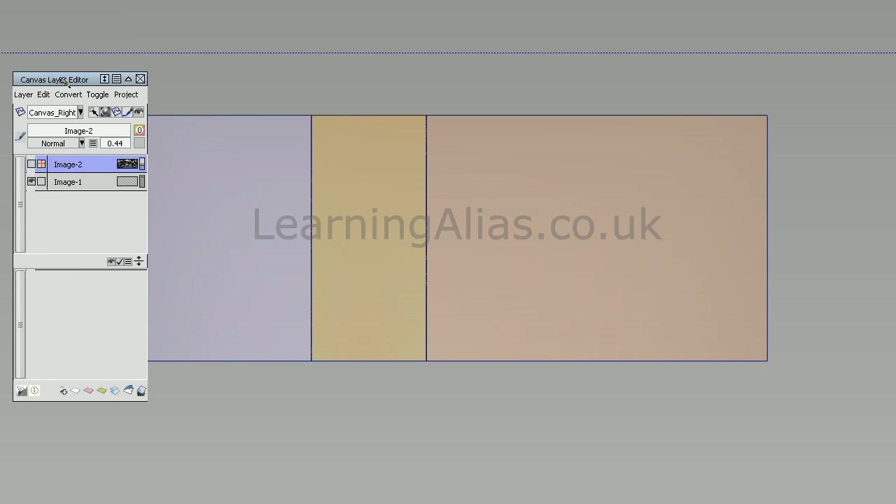Welcome to part 3 of the motorcycle tank tutorials. I'm Alex Popov, and in this video we'll be defining the outer edges of our side surfaces by creating curves, projecting those curves onto the surfaces, and then trimming to our curves on surface. We'll also build the underside surfaces for our tank.

I'm going to use degree 5 edit point curves to define the shoulder line for this tank. Really just trying to work out where the top and side surfaces would intersect, and I'll use this sort of highlight here as reference to where I believe that point will be. So put the first curve down, degree 5 edit point curve, select the CVs and move them into position.

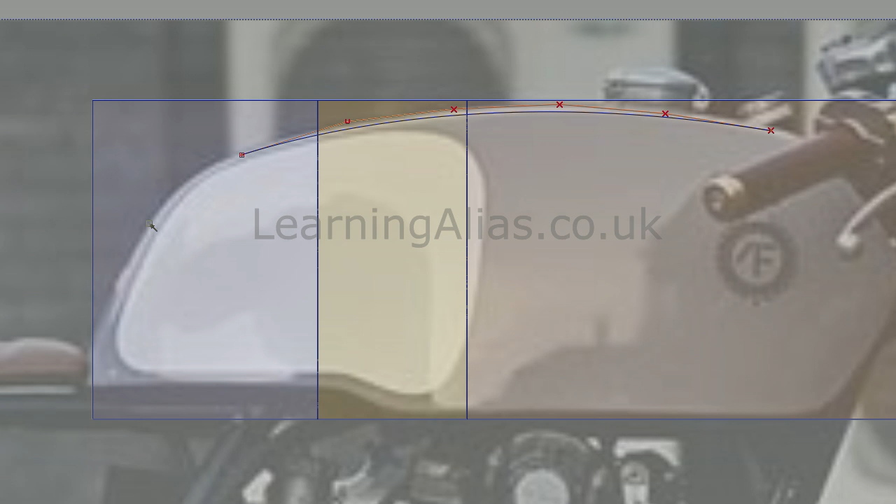When placing the curves, you want to kind of break up your overall shape, so not any one curve is doing too much work. These trimmed edges will build our top surfaces from, and again, you don't want any one surface to be doing too much work. As you can see here, my curve network is broken up into manageable sections. I'll select individual CVs and move them roughly into position so that they reflect the shape of the tank.

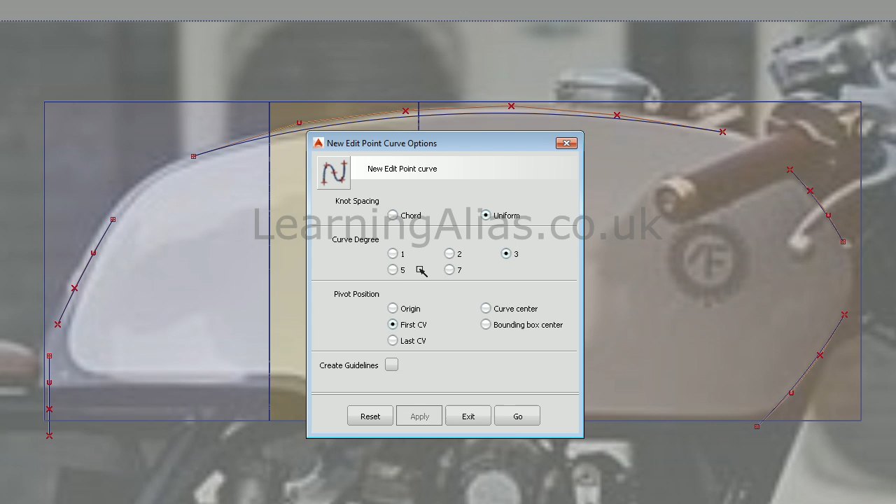For the tighter corners, I'm going to use a degree 3 edit point curve, hold Control and click next to the CV you want to snap to, and they'll snap to position. And to clear the view up a little bit, I'm going to put my surfaces onto an invisible layer. I will now align with G2 continuity these curves here and here, as well as the other side.

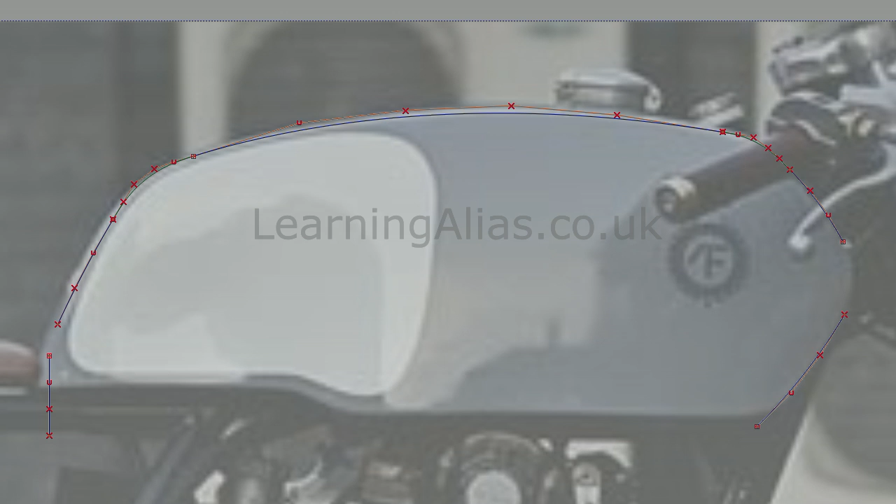For the purposes of this video, with speed and time in mind, I'm just going to show you how to construct these top few curves we've been working on. However, for the remaining curves, the workflow is exactly the same, so just mirror what you've done here. I'll analyze the curves with the curve curvature locator, and then we'll improve the combs using the transform CV tool.

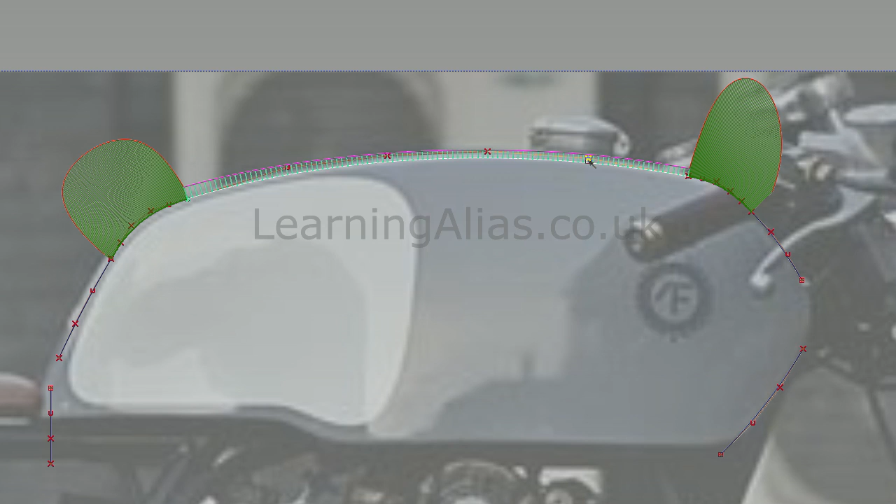The comb is telling us we've got G2 continuity between our curves. However, we can use the transform CV tool to get closer to G3. We can also try and get a more uniform crown on our comb for our aligned curves. Because of the alignment history on our smaller curve, playing with the G1 and G2 CVs on the parent curve will give us a smoother crown to our comb for the aligned curve, as you can see here.

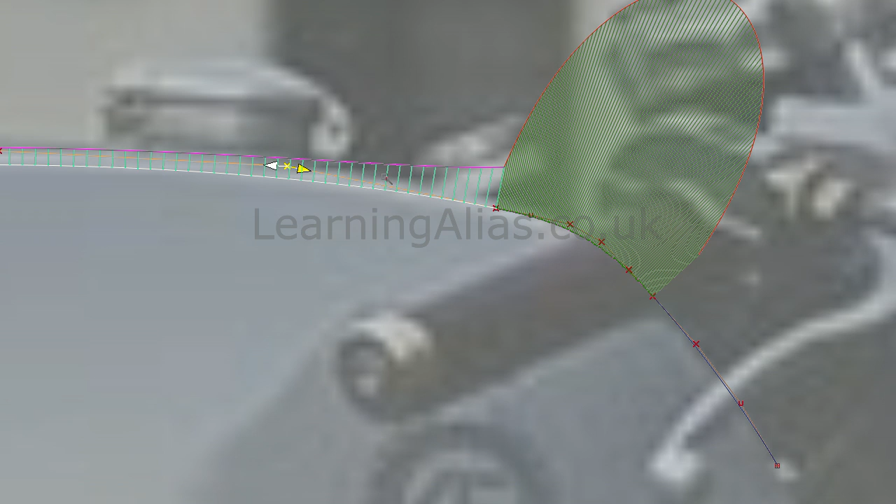I can also play with the G2 CVs on the aligned curve, pulling them close together. We'll get a tighter peak on our comb. Playing with the G1 on the parent curve helps the lead in. So you can see we're getting closer to G3 continuity. Same again on this side.

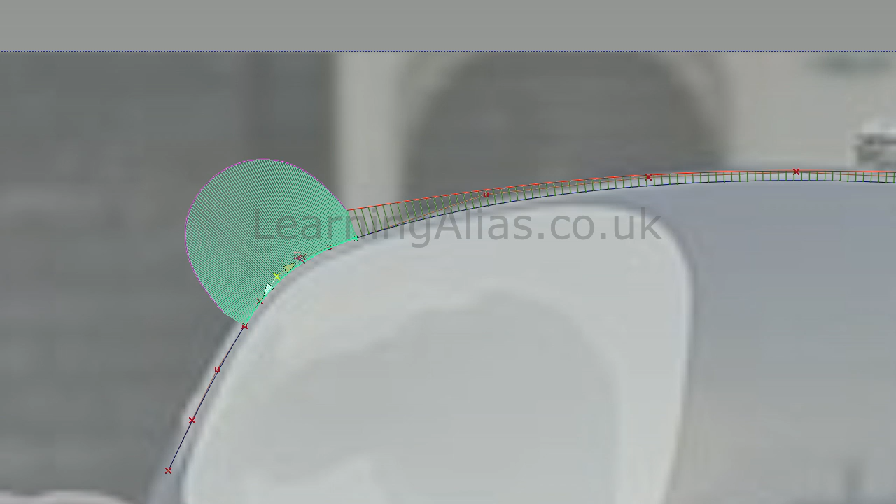Increase the lead in by transforming the CVs on our parent curves and improve the uniformity of our comb. There we go. So you can see we're edging closer and closer to G3 continuity. I can also move the end CVs if I'm struggling to obtain G3.

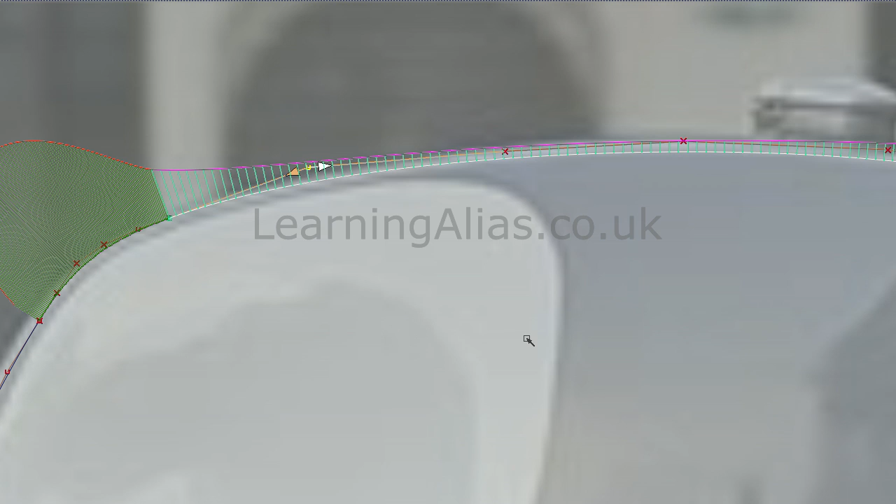The reason for doing all this work is because these curves are going to make our trimmed edges that we're going to build our top surfaces from. It will make obtaining G2 or even G3 continuity along our top surface boundaries far easier. So I'll jump forward and you should end up with a curve set that looks something like this.

And you can apply the curve curvature locators, and when we scale that down to a readable size, you can see that it's all nice and smooth and nice and uniform. Again, this was done using exactly the same workflow as I've just shown you.

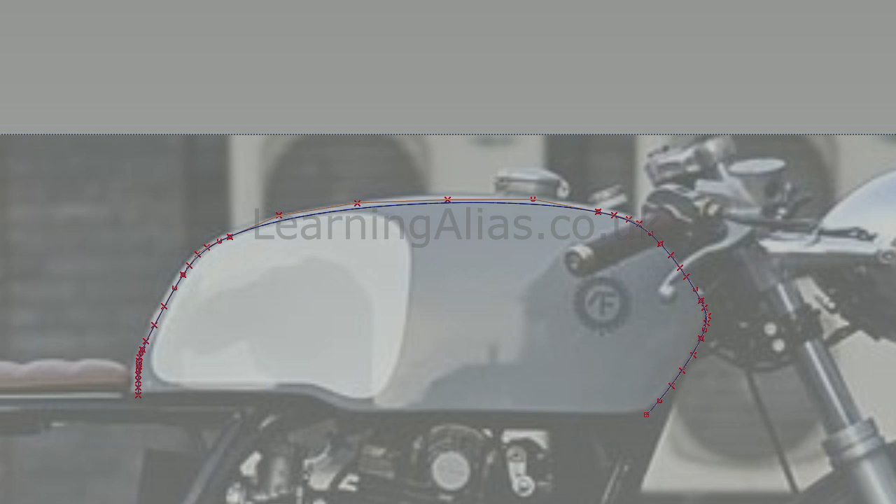So now we're ready to move on to the underside of the tank. Rather than building the underside surfaces from the trimmed edges of our side surfaces, I'll show you a different workflow where we build planes and intersect our planes with our side surfaces.

So planes are considered simple surfaces. You can find them in the surface section of the palette, just here. I'll just quickly toggle my grid back on and snap my plane to the grid by holding Alt. And then I'll set the pivot, Control Alt click, and snap the pivot to here.

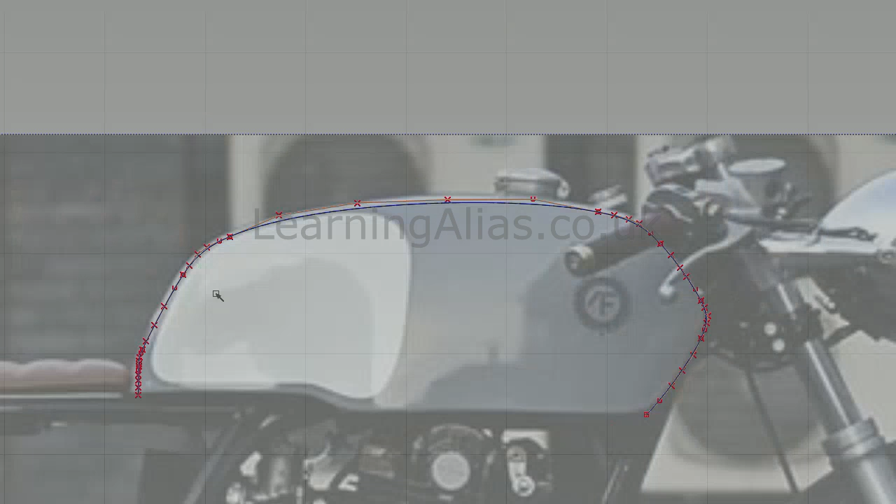Jumping to side view, I can hold Control and move my plane, snapping to that CV there. I'll then scale the plane to where the underside of the tank remains flat, so about there. In top view, you'll see my layer's got symmetry on, which isn't an issue at the moment. What I want to do now is set the pivot, as we did last time, and snap to the grid, constraining to the Y direction. I'll then non-proportional scale my plane outboard so that it's intersecting with the side surfaces.

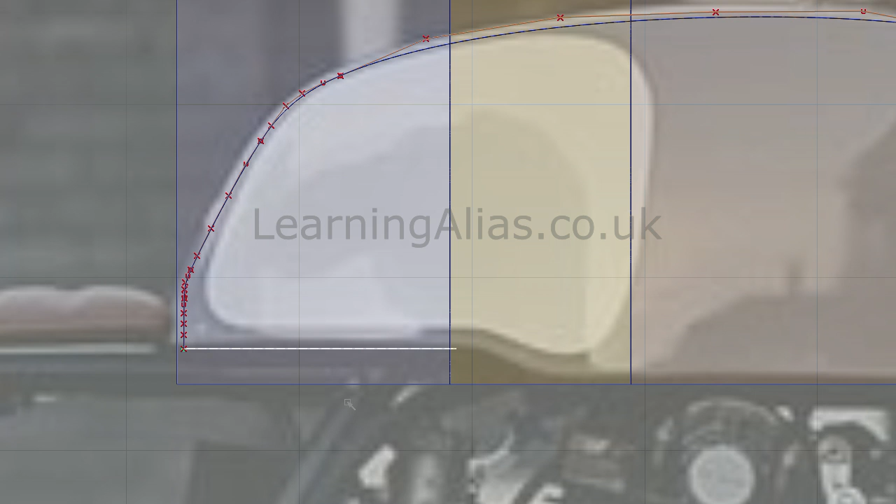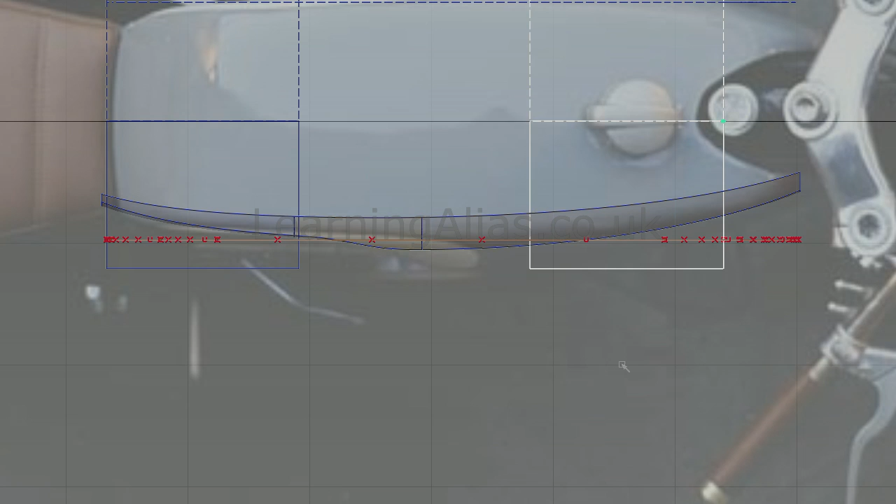For the front section of the underside of our tank, we'll copy and paste the plane we've just made and move it into position. Firstly, we'll snap the pivot to this edge and holding Control will snap to that CV. I can now move to top view and position my plane snapping to the grid using Alt, but constraining to the Y direction so that I don't change the height of the plane. Holding the middle mouse button, I'll scale non-proportionally this plane to where the underside surface of our tank remains flat.

With the front and rear sections for the underside of our tank in place, we can now move on to this S-bend section here. So again, we will duplicate our plane by copying and pasting. We know the pivot's in the correct position, so we can scale it non-proportionally by holding the middle mouse button and move it into position. This time we will rotate. Remember to constrain to the correct axis when you're rotating, and scale a little bit more. There we are.

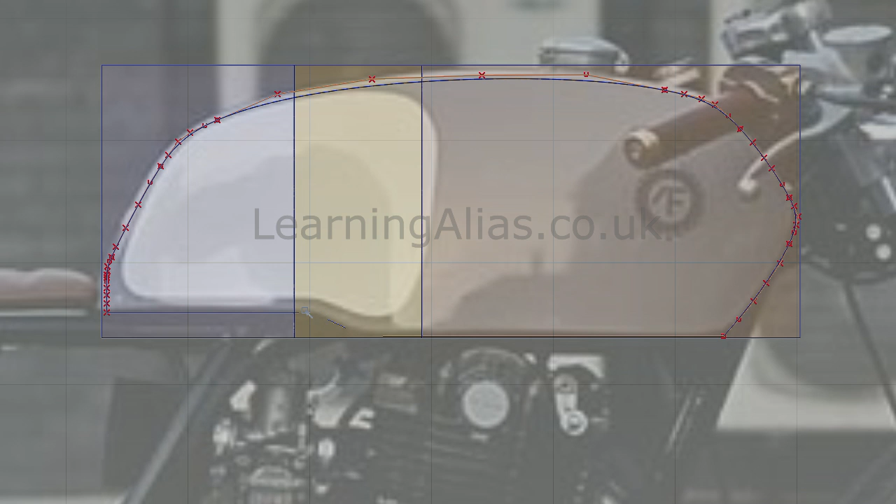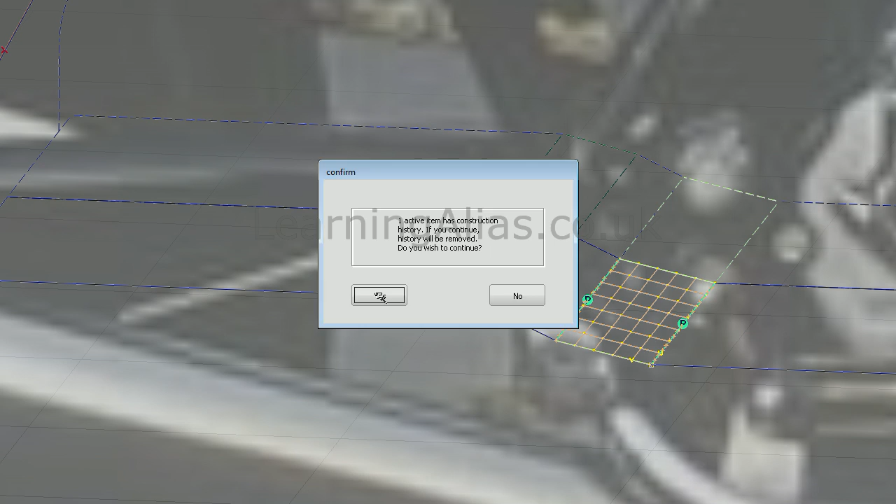With the main flat surfaces in position, we can now create these curved blend surfaces that will form the S-bend in the underside of our tank. To do that, there are many different ways, but this particular workflow is very quick and very easy, and it utilizes the skin tool. So I'm going to skin, and we only hold positional continuity at our surface boundaries. So I will change the degree in the V direction for the surfaces to degree 5, and we only want degree 1 in the U direction, as shown here. We're now able to align our surfaces with G2 continuity.

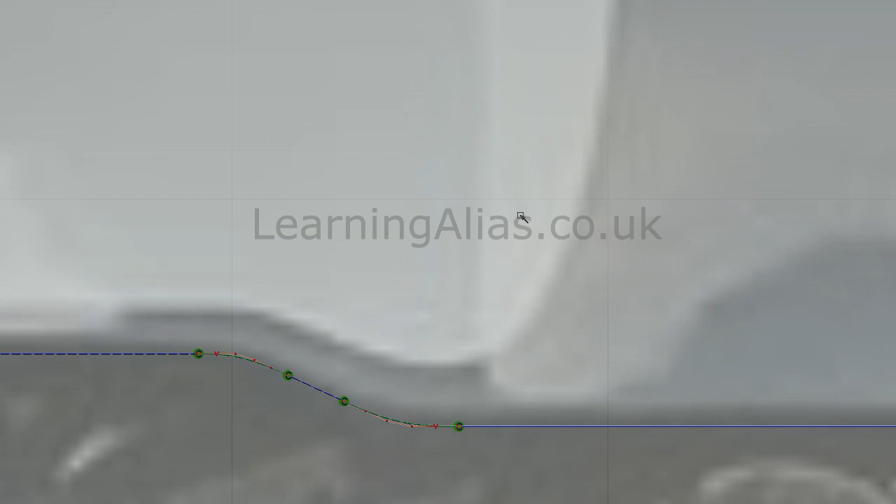As I say, this is just one way of many to create these blend surfaces. You could have used the freeform blend tool. You could have created construction curves, aligned and squared surfaces, but this is an easy way to do it. So I'll unhide the side surfaces, and we're ready to perform our intersection to create some curves on surface. I've just hidden my canvas layer and my grid. Now the intersect tool can be found in the palette here in Surface Edit under the project option.

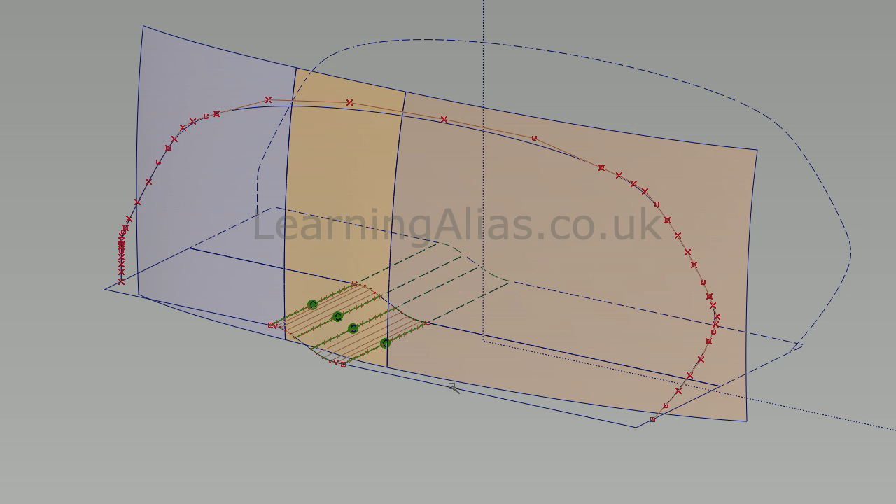First of all, select your main 3 side surfaces and then hit spacebar, and then be very careful just to click once and once only on the underside surfaces. If you click more than once, you'll duplicate your curves on surface, which is not good. Now go back and select the project tool instead of intersect, and select our surfaces, hit spacebar, select the curves, hit spacebar again, and we'll have some curves on surface we can trim to.

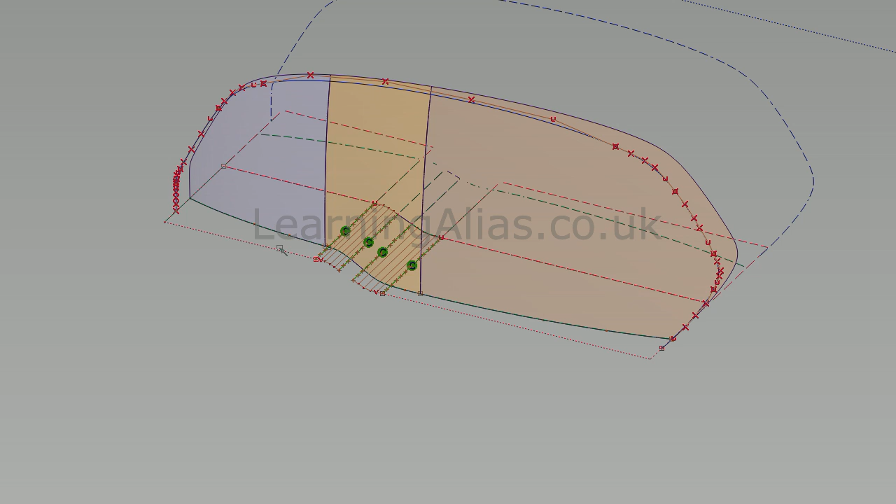So now with the trim tool selected, we want to keep the sections of the tank like so. Hide the locators, hide the CVs on the curves, hide the curves in fact, and apply some symmetry to the side layer. Finally, delete the surface history for our surfaces, and that's a good place to leave this video.